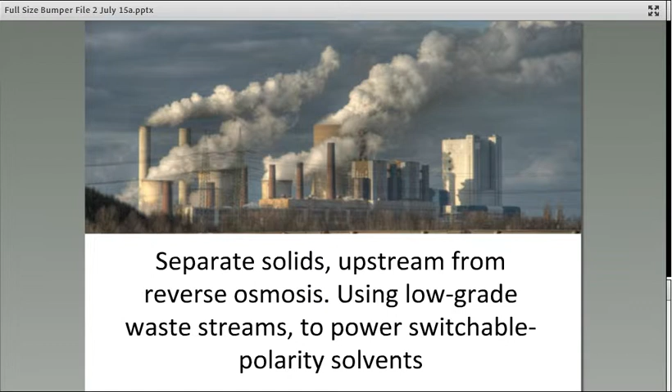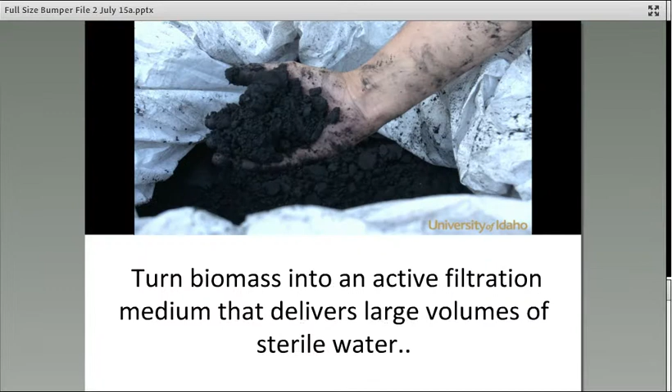Aaron Wilson has a method for using waste heat, low-grade waste heat, to use switchable polarity solvents upstream of reverse osmosis to clean the waste stream. Greg Moeller will be talking about his method for turning biomass into active charcoal to sterilize water. They're both really excited about this, as are their directors at the lab, and we are obviously shamelessly teasing you.

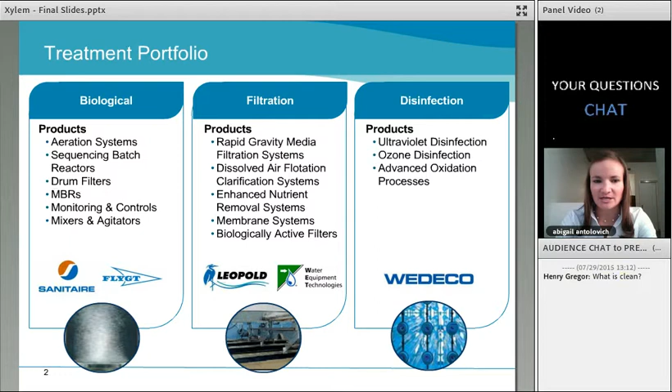I'm guessing a number of the attendees on the phone today are very familiar with that, probably have biological treatment systems themselves. I'll talk about some of our filtration and tertiary treatments, and then also how some of the advanced treatments such as disinfection and advanced oxidation are playing into water reuse applications today, and how all of these trains might fit together for meeting certain water quality requirements in the treatment process.

So just quickly, I want to cover a little bit about Xylem's approach to fostering water reuse projects. We have a number of areas. The beauty of Xylem is we've got a broad portfolio of technologies, so we've got the process integration expertise to look at an entire wastewater treatment system and figure out the best places to either tweak it, whether it be with monitoring devices, testing devices, or additional treatment processes.

To help improve the efficiency or improve the water quality coming out of a wastewater treatment system, there's a lot of focus right now within Xylem on optimization for existing facilities. And in addition, for facilities looking to improve water quality, perhaps for reuse, whether industrial reuse or reusing water for drinking water supplies, we also have advanced technologies to help foster that. A lot of focus right now is on efficiency.

I imagine many of the attendees on the line are looking a lot at efficiency. The water-energy nexus is becoming a big topic right now. So looking at life cycle costs, where we can make efficient water treatment processes while minimizing the energy consumption going into treating the water, is a key area that Xylem is focused on right now.

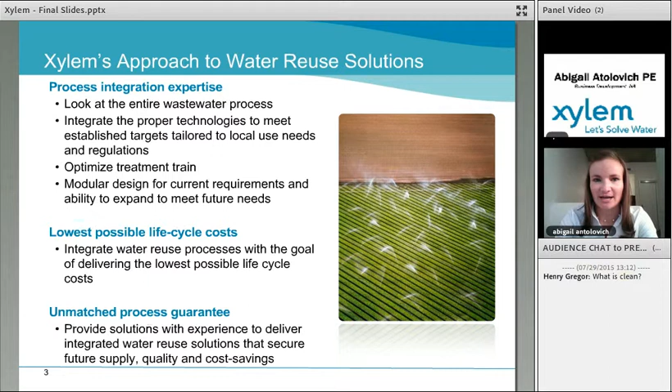With a lot of our controls and optimization systems. And when we look at process guarantees, for those of you familiar with the brands that we carry, you'll know they've been around for quite some time, and we've got hundreds and thousands of installations for some of our technologies, both domestically and around the globe. With those installations and that history and expertise comes the ability to give some process guarantees based on what we know from the past and how we're looking at clients' water quality criteria for the future.

So I just wanted to set the stage a little bit. I've got two other presenters coming after me who are also talking about treatment technologies. But one thing I wanted to set up is just the concept of different ways you can essentially mix and match treatment technologies to come up with a treatment train that's ideally suited for meeting a certain water quality criteria.

If we look at the different types of treatment trains for water reuse, we might start with something that would require a lower water quality, so perhaps cooling tower makeup or on-site irrigation. That could be a fairly simple treatment train that would involve secondary treatment, maybe with some biology, some simple filtration, and a little bit of disinfection just to keep any pathogens from occurring in the water quality.

As we start to look at industrial reuse, there are a lot of different places the water can go when it's back on site. You can start to look at more demanding water quality requirements, such as boiler feed makeup, potentially even process makeup. There are some installations where water reuse is being implemented at food processing facilities where it's actually coming into contact with the food products.

In those cases, they're looking at very advanced treatments that would essentially mimic what a potable reuse scheme would look like, maybe something like at the bottom there where you're incorporating everything from secondary treatment all the way to advanced oxidation and very tight membrane filtration with reverse osmosis.

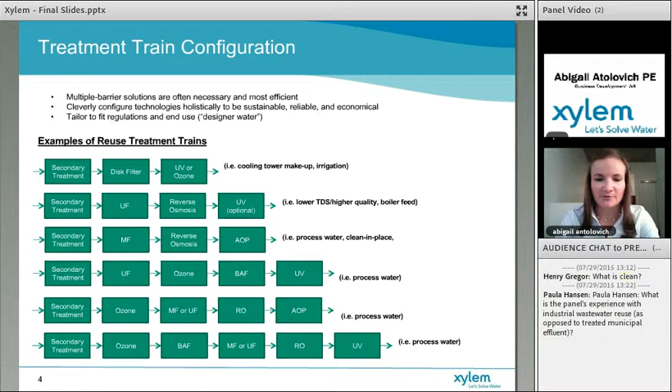So I just want to quickly step through each of the different types of treatments that were on that last slide and talk about where Xylem plays into those facilities as well.

Biological treatment is typically considered secondary treatment in most wastewater facilities. I'm guessing a number of people on the phone have experience running or designing biological treatment systems. It's usually used for bulk removal of contaminants like organics and nutrients. The best kind of biological treatment process is site-specific, depending on what kind of footprint is available, what kind of energy consumption somebody is looking to minimize, and what kind of downstream and upstream treatment processes they may have.

I've listed a few different types of biological treatment systems in those greenish, bluish squares - everything from traditional activated sludge systems all the way to advanced biological treatment systems such as membrane bioreactors. A couple things Xylem offers in this space: we've got the ICEAS Advanced Sequencing Batch Reactor, which is essentially a sequencing batch reactor done in one basin that helps minimize some of the footprint over traditional SBRs.

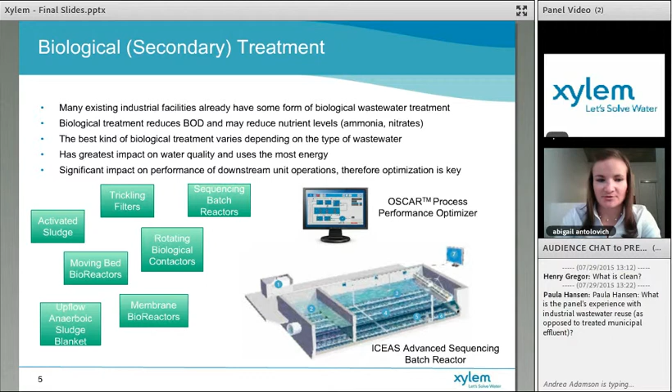In the context of energy efficiency and process optimization, Xylem also has an Oscar Process Performance Optimizer package. Xylem offers a number of control and monitoring systems, and when we're looking at biological treatment facilities, particularly ones that require aeration that consume energy, this is an interesting available process to consider how those units can be optimized with respect to energy consumption.

Tertiary treatment usually involves some sort of filtration or disinfection. This can range from loose membranes like microfiltration membranes or disc filters, and then you might look at either chlorine or ultraviolet light to do some disinfection there.

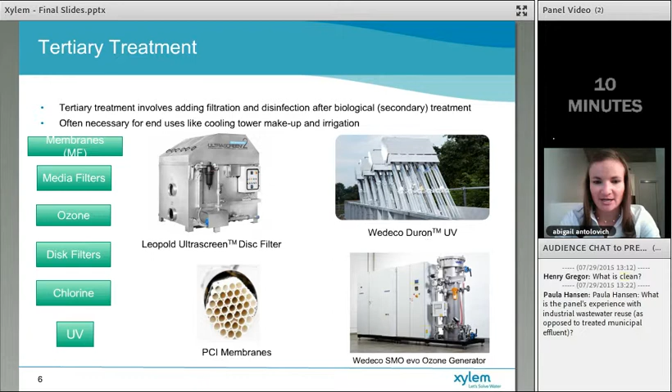Again, Xylem brings a number of offerings to the table here. We have recently launched the Leopold UltraScreen disc filter, which has a very long-standing history, particularly in Europe, for industrial applications for solids removal. The Wedeco Duron UV system is a brand new offering designed to help minimize operational issues when it comes to cleaning and replacing UV lamps. We've got our membrane lineup and also some ozone generation systems through Wedeco.

Finally, on the advanced treatment side of things, Xylem offers a couple of advanced facilities. One, although it's a traditionally used process step, is ozone plus biologically active filtration. What Xylem has done with its years of process experience and treatment technology expertise is incorporate those two processes together into a process optimization package.

We also have pilot test facilities - something called the MiPRO pilot test unit that customers use to evaluate different types of advanced oxidation. When people are looking at advanced treatment, it can range from advanced oxidation to reverse osmosis membranes, or combinations of these two. We've got a couple quick videos that go through these - if you could cue those, that would be great.

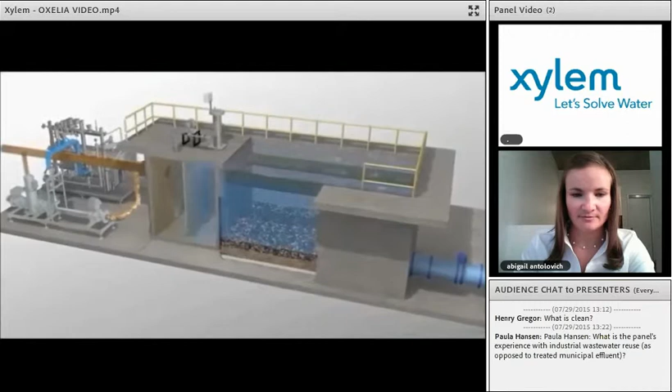The Leopold Oxelia Ozone-Enhanced Biologically Active Filtration System combines the treatment synergy of ozone oxidation and biologically active filtration into a single process solution. This powerful multi-barrier system reduces pathogens and destroys previously difficult-to-treat contaminants.

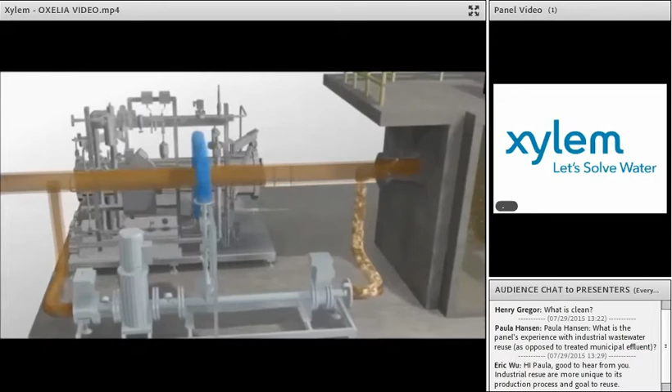How does the Oxelia system destroy these contaminants? Wastewater is first dosed with the precise amount of ozone, based on flow rate and water quality, to meet the oxidation demand and treatment objectives. The ozonated water then flows through a baffled contact chamber, ensuring adequate contact time for the ozone to disinfect the water and oxidize most of the trace organic contaminants.

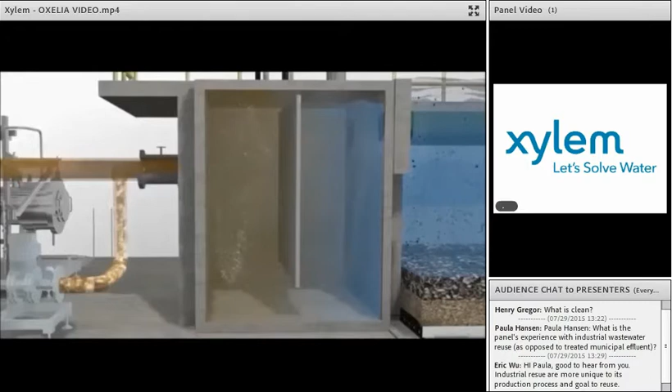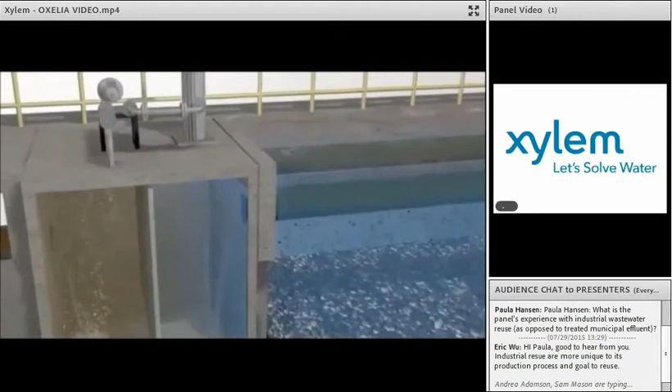Ozone's powerful oxidation breaks the chemical bonds of pharmaceuticals, industrial chemicals, pesticides, and endocrine disruptors, making these substances biologically degradable. The wastewater, with these partially oxidized organics, is then filtered by a biologically active filtration system using the filter media to support an attached growth biomass.

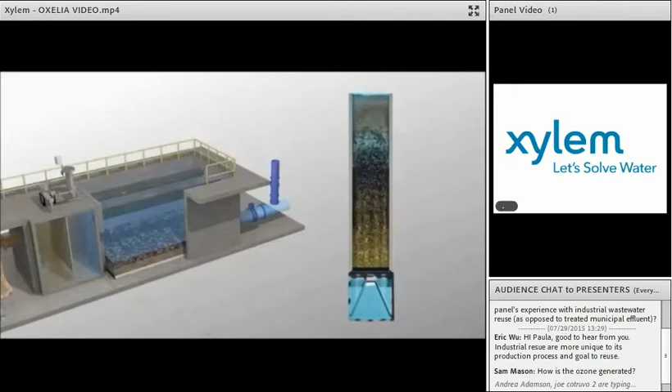The microorganisms growing within the filter media consume and destroy the organics and oxidation byproducts, removing them from the water stream. The active biomass also reduces the remaining BOD and ammonia, and the filtration process traps total suspended solids, increasing the UV transmittance of the effluent stream.

The Xylem ozone-enhanced biologically active filtration system produces a cleaner and safer final effluent, low in total organic carbon and extremely low in turbidity. The system destroys harmful pathogens, leaving no chemical residuals or disinfection byproducts, making the filtered water suitable for many reuse applications or for discharge into the most sensitive ecosystem.

And because contaminants are destroyed and not just concentrated, the backwash stream can be recycled to a plant's headworks or even be processed with solid handling equipment.

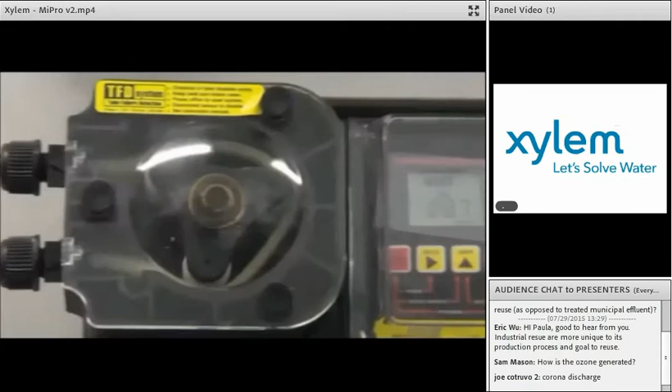MiPro AOP pilot container is very versatile and can be tailored to each project's specific requirements to evaluate a number of different treatment processes. Xylem's portable container is easy to use, manually or fully automated, with real-time monitoring for your testing needs. It's got the ability to use ozone, UV, or peroxide, and pretty much any combination of those.

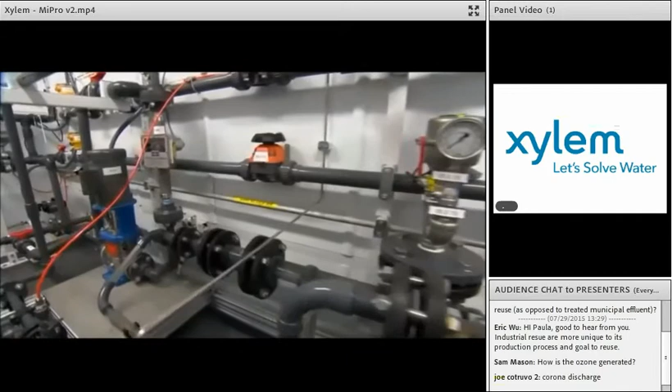We just make sure that we set all the set points and the doses to where we want them to test what we want, and we can just leave it.

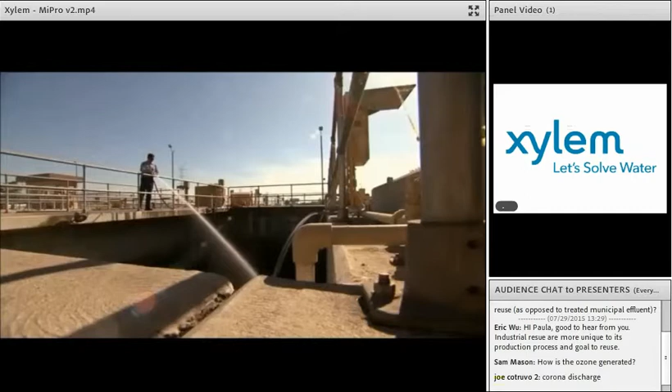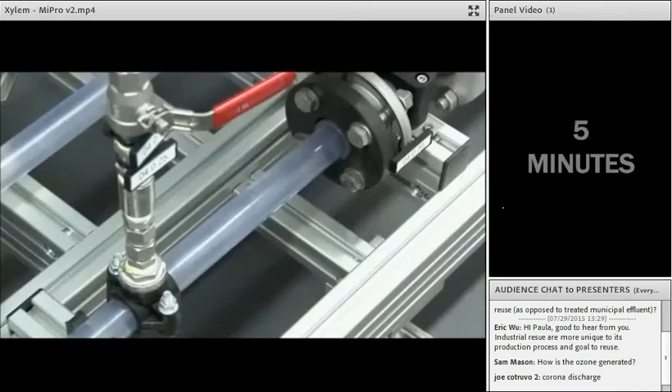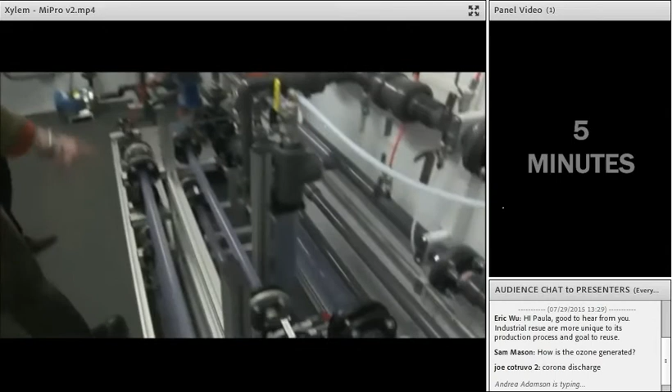At Xylem, we know that stringent requirements demand wastewater to be free of more pathogens and trace contaminants than ever before. That's why Xylem has created this sophisticated pilot test system with the most advanced water treatment technologies available today, all in one container. The MiPro AOP pilot container is valuable for the customer because it allows them to quickly and efficiently evaluate multiple treatment processes within one system.

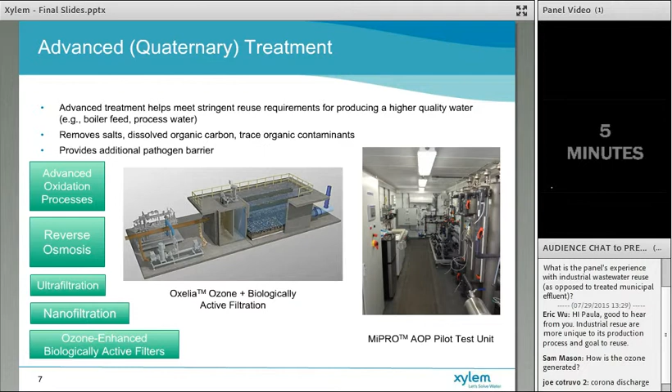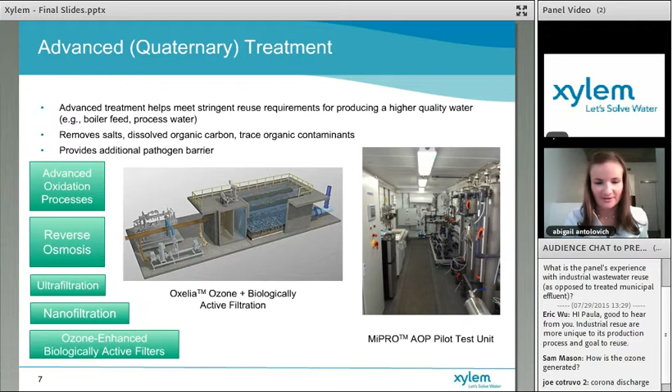All right, thanks for rolling those videos. Can everyone hear me back again? Yeah, we got you. Some of our presenters need to mute. I think it went away. Fine. There was an echo, but we're fine.

Go ahead, Abigail. Perfect. One of the things that was raised from the panelists when we started this discussion was a comparison of treatment costs. And while it's a little bit hard to talk specifics without having a specific project in mind, I did want to cover the comparison between, for example, some biological treatment processes and oxidation technologies, looking at things like footprint, installation costs, and operating costs. So this table just gives a relative idea of where all those different technologies sit and other considerations to give when manufacturers are thinking about installing different types of processes.

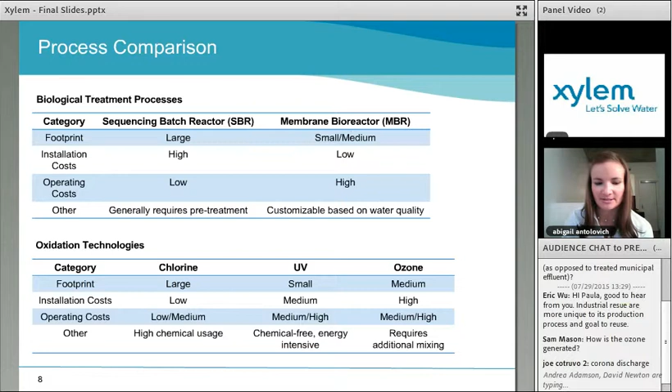I did want to run through a few case studies where Xylem has implemented some industrial water reuse facilities. The first one is a raisin producer. This one was producing wastewater that had a lot of dust, sugar, and other contaminants from the raisins. They were looking at transportation costs around $50,000 per month to a municipal treatment plant. One of the things they wanted to do was look at reusing that wastewater. What they decided to do was install a membrane filtration system to clean the water and then reuse it for washing or irrigating in the nearby vineyards.

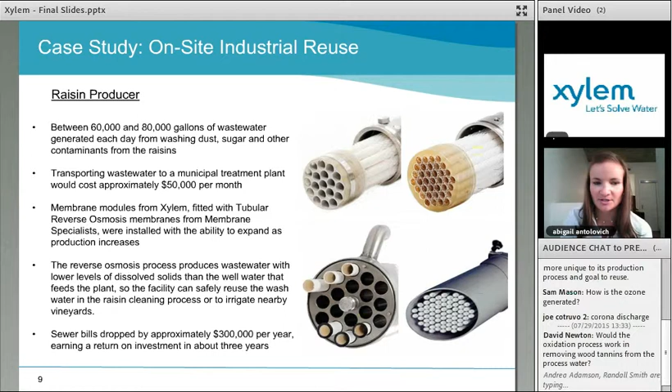In order to do this, they used membranes from the membrane specialists, and then Xylem helped support the project by fitting out the membrane modules with tubular reverse osmosis membranes. The really great thing about this project from a financial standpoint is that it was able to decrease their sewer bills about $300,000 per year, which gave them a return on investment of just under 3 years, which is pretty good for industrial reuse projects. So that's just one example of where some membranes have been used in a food manufacturing facility.

The next one I want to talk about is a pharmaceutical plant over in Ireland. This one had some active pharmaceutical ingredients from the manufacturing process, which as you can imagine are fairly exotic and can be difficult to remove or deactivate. The manufacturer decided that they wanted to introduce some additional good corporate citizenship and improve their sustainability goals by doing a water reuse project. They did bench and pilot scale testing to evaluate what technologies they wanted to use and finally settled on using a combination of membrane bioreactor plus ozone oxidation to destroy the active pharmaceutical ingredients and help protect the environment. This one has been online since 2005 and has been used for cooling tower makeup.

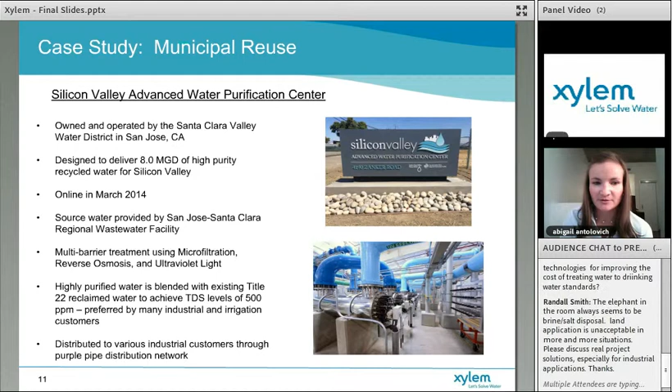The final one is in Silicon Valley. It is operated by the Santa Clara Valley Water District in San Jose, and although this is a municipal treatment plant, they send a lot of their water to the local high-tech industries in the valley there to be used for irrigation, cooling tower makeup, and a number of other non-potable processes. This uses microfiltration, reverse osmosis, and UV systems provided by Xylem to help treat the wastewater.

So finally, what Xylem is offering to bring to the table to help industrial manufacturers is really a partner to doing the treatability testing all the way from installation and selection to aftermarket. We have a number of installations both domestically and across the globe to help with our expertise. We can provide a single source of support with the variety of treatment technologies and monitoring equipment that we offer, as well as process performance guarantees and aftermarket services. So that's all I had on what Xylem brings to the table, and again, just kind of setting the stage for the different types of technologies. And I will turn it back over, and we'll move on. Thank you.

Thank you. And panel, can you join us again, please? Thanks, Abigail. Stick around. We're going to ask the panel. Panel, while we're waiting for your cameras to show up, well, there you are. So Eric, why don't you lead off? Any questions or concerns for Abigail?